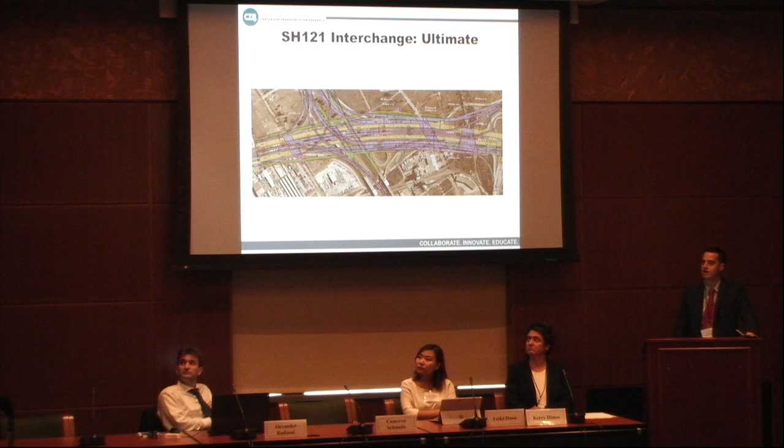But they got some additional money—woohoo, yay, we love money. So they got about $70 million, and they said, okay, what do we want to do with this? Their idea was to provide more access to that managed lane system, that highway in the middle. There were two areas where they did that.

The first one is the I30 Connector. This was actually not in the Ultimate plan, but it was so smart—I don't know why it wasn't part of it, I just don't think it was part of the study. What it did was provide a direct connection from I30, which runs right through the middle of downtown, and 35 does as well. Downtown's kind of in this corner right here.

So they said, okay, how can we—this is one of those areas where, as you can see from the colors, there's not much construction planned. So they said, with this, how can we squeeze this new ramp in? That's where that innovative design comes in, with the private sector.

So I'm just going to show you a video of it because this is a visualization conference, and that's probably best.

So again, what they're going to do is take the existing direct connector, peel off of that, and then hop into that managed lane system in the middle. This is just nice to provide people context—so downtown Fort Worth right there.

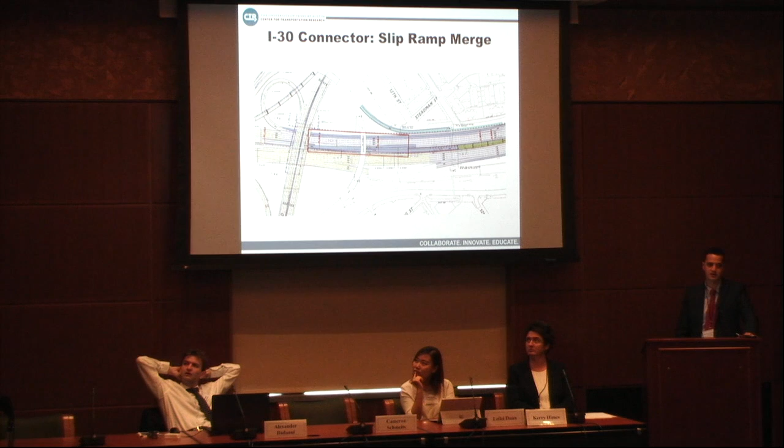We said, okay, well, let's look at it from a driver's perspective. So we took that same model and got a different view of it. Again, what we're doing is simulating a driver—we're driving 60 miles an hour, basically like you're in a car. We've got everything modeled for you.

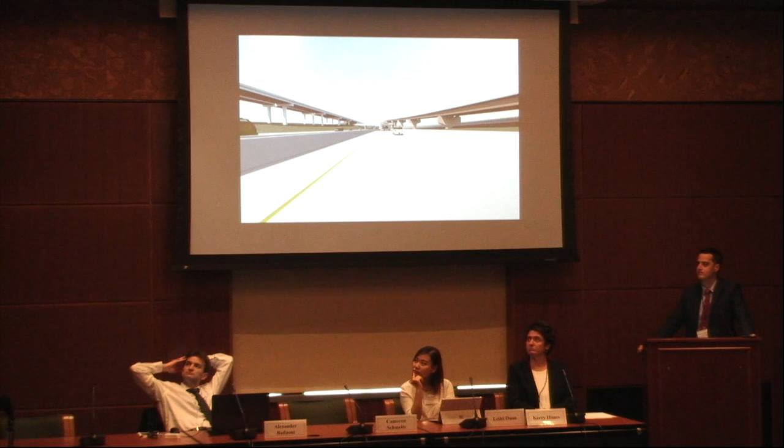So the direct connector's on the right, and it hops over. That bridge is existing to remain. You've got this retaining wall, you've got this barrier. Will I be able to find a gap from all these cars? And while we're traveling at 60 miles an hour during peak, this is a city. You might not be traveling at 60 in the free lanes, you might be traveling at 0. And then these people coming down have been driving for about a mile, going like 120 miles an hour because they've been sitting on that ramp for days, it seems like.

So we showed TxDOT and we showed the developer that. What happened was, we said we'd looked at this several times via the schematic I showed you earlier. But what we didn't see is that the only thing stopping us from moving this merge was a column - that column right there. So we have plenty of room to move that gore and create more space. We looked at that drawing several times, but 3D just gave us a different perspective.

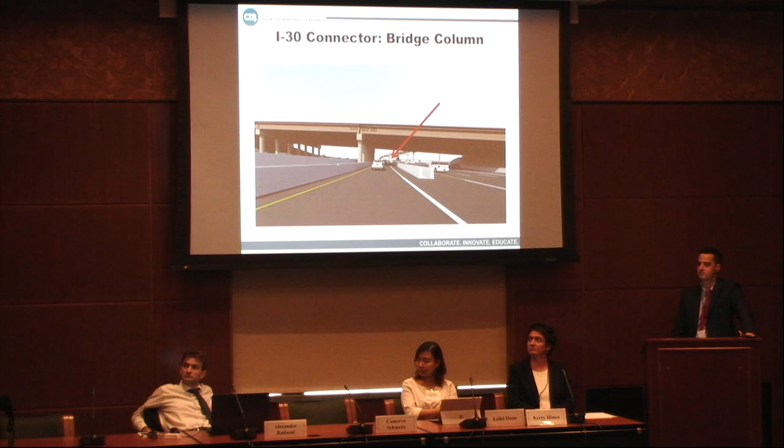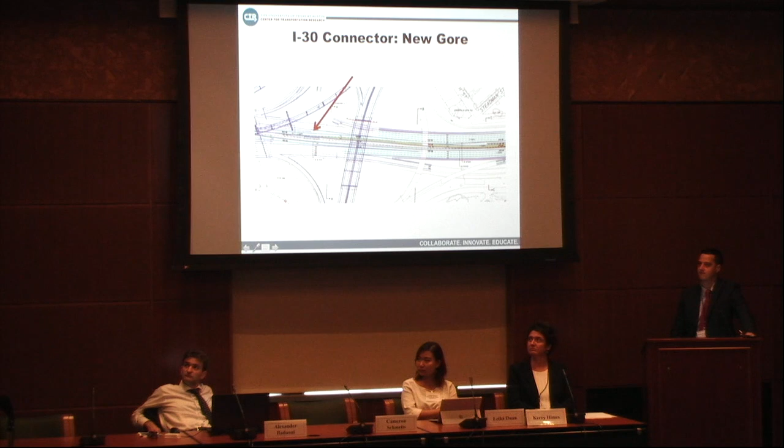So what we did was we moved it. You can see the gore right there - this is the new gore. You see it's significantly further to the north of this bridge than it was before. So just looking at it in 3D, who knew? Different perspective, more information.

Another addition we had, this is in that same 121 interchange, where it's going from nothing to craziness when you get to the ultimate. We had some more money, so we decided to add in this connector. 121 is a highway, but it basically terminates into city streets in downtown. They wanted to provide people access from downtown to the managed lanes so they could get home. In the DFW area we have urban sprawl, which Lele talked about. People drive - I drive 29 miles to work, and that's about average. So having access to those managed lanes is very important for those people.

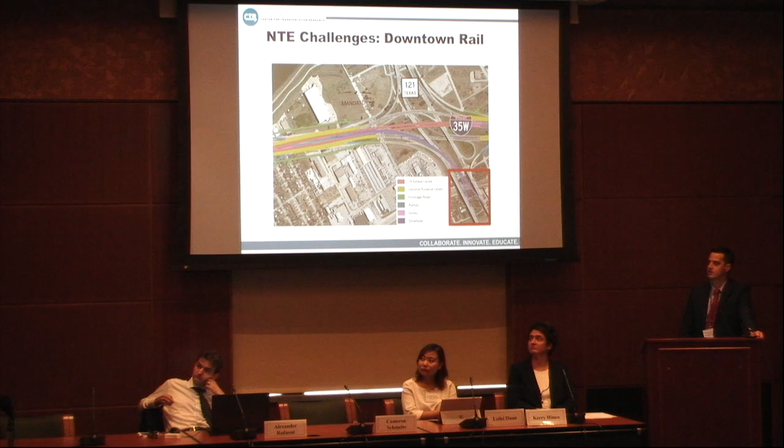Like I talked about earlier, we have architectural requirements becoming more and more a part of our highway. Since we were coming into downtown Fort Worth, the city wanted an architectural element because the existing highway it's tying into has that element too. You can see in the orange, that's highlighting the existing rail on 121. They had this nice, beautiful rail, nice lights, and you can see downtown in the background, how close it is.

So the city of Fort Worth wanted to add that same rail to the connector. We said, oh, we can't really do that - the design speed doesn't work. It can't work for high speeds because there's not enough structural support. But we can do it on this little portion in yellow.

So talking about stories - public and private partnerships are supposed to be partners, but there's competing interests that sometimes come into play. One doesn't want to spend money, one is okay with spending money because it's not their money, but they want to provide a great product for the public. The developer came and said, hey, we agreed to this, but we're not really sure if you're going to be able to see that. We don't want to build something no one's going to see - it's an architectural element. If you're coming on 121, are you really going to see this rail in yellow? If you're coming out, are you really going to see it? We don't think so. There's a rail.

So the project manager looks over at me and says, can you model that? And I said, gotcha.

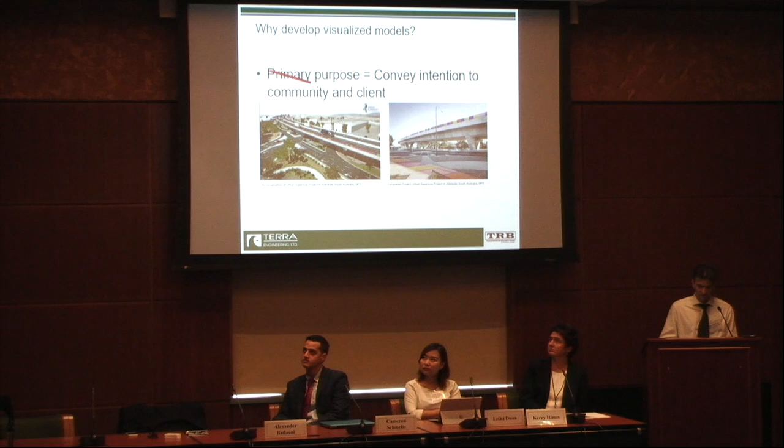However, that is not the primary purpose of why we build models. So why do we build models? The primary purpose is to make a centralized data source for all the information. This way, plan production, quantities, option development, eventually automatic grading machines, and visualization is a subcomponent to that. This way, all the data can come from one source, and you're always guaranteed to get a clean result every single time, not the product of the visualization result.

So the engineering application is really the true primary purpose of why you build these 3D models. These investments in 3D lead to much more increased efficiencies and effectiveness because we're able to make these products in one piece, and then the outputs come from that model rather than the traditional way of building the outputs and then making the model from that.

We have one centralized model, one place to make the changes, as people who know Lord of the Rings, one ring to rule them all, one model to control everything is the idea behind the purpose of building a centralized model. So, how are these models developed? This is what the current teachings will demonstrate.

If you open up any package of a Bentley product or an Autodesk product, out of the box it's to build one corridor per alignment. There are pros and cons to this approach.

The pros being you get one corridor per alignment to get a simpler representation of the road. However, the cons, and the biggest one, is that the road changes so often along its length that the templates you need to build become so complicated that only the person who made them can edit them, because design builds, especially large projects, change every 10 minutes about what they want on the road. So in order to change the product, these templates need to be so comprehensive to cater for every scenario that it's too complicated.

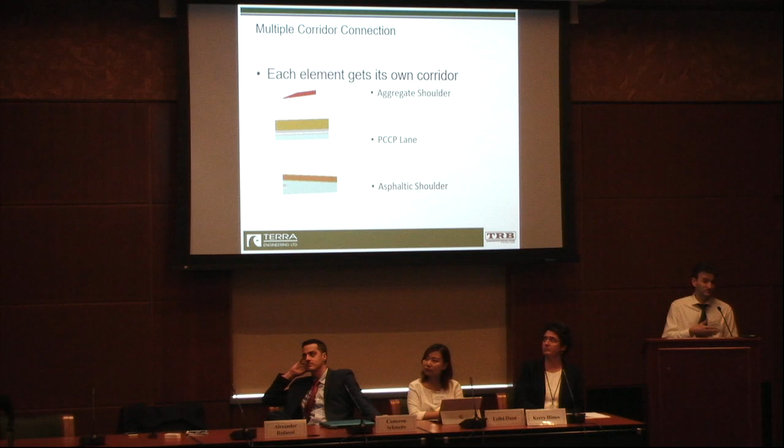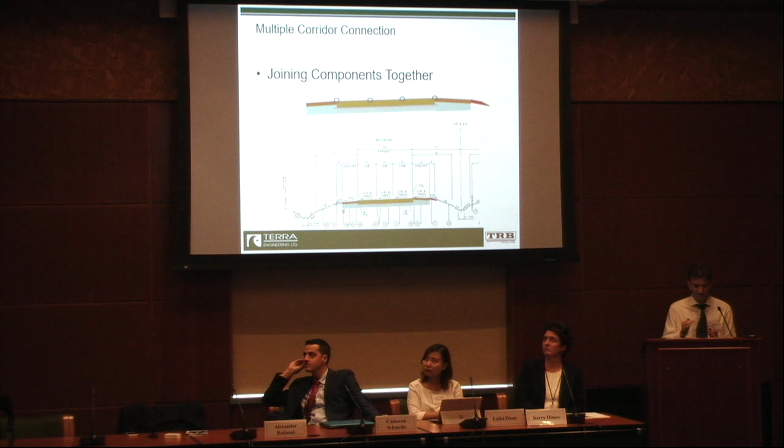Each of these pieces is a different corridor, and each of those circles shows how they all connect. Because each of these pieces connects to each other, we now have a whole series of interchangeable pieces that we can change anytime we want, because sometimes you want to change a part of the road, not the whole thing. You cannot do that if it's one template. You can do it if it's multiple.

I don't like that curb anymore - the client says, I want a barrier. You just switch it out and reconnect. I want to put a lane in there - you insert it where you need it. Notice how the rest of the lanes have stayed consistent. So I've only changed parts of the template.

Now we can go further and start to add external components to multiple roads. I want to add a ditch - I add it where I need it and connect it where it's required. I need a retaining wall and a parkway - I add it where I need it and connect it where I need it.

And I need safety - I need a piece of guardrail, better put that in there. But I only add the pieces where I need them and connect them where I need them. Now, in between, each one of those red lines represents an interchangeable corridor where the template can change anytime you want. So now you have an infinitely complex yet simplified design because it's all made of lots of little simple pieces.

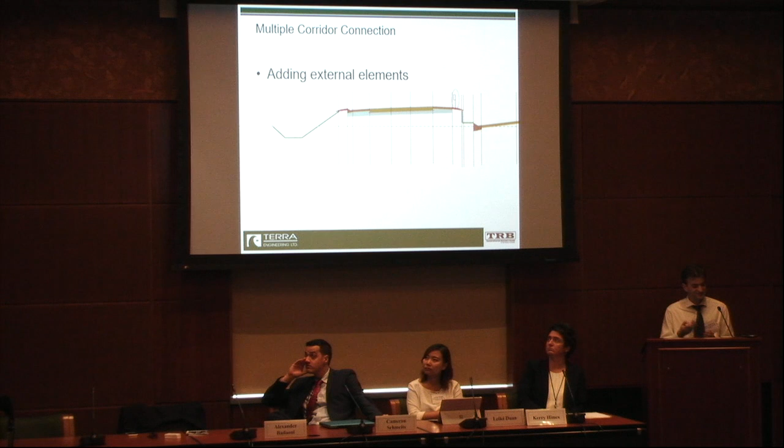How do we manage this mess? That is an understatement. I have a job which I'll be showing at the end, which exceeds 3,000 different corridors. How do you manage that kind of database?

Well, centralized data with a very comprehensive yet concise naming convention.

So how is this better than building a single template? Well, for starters, the templates are simpler. The road designer and the engineer spend all their time doing what they're supposed to be doing, designing the road, not designing the complicated template. So they've got a library of templates and they can use those templates.

A lane doesn't change. The section of tollway with PCCP, subbase, and base course has been around since the 50s, so that section is not going to change anytime soon. You can use that template on any tollway project. A curb profile in the state of Illinois hasn't changed since the concept of curb existed, because Illinois doesn't change very often. So that template, you build it once, you use it thousands and thousands of times on multiple projects. You spend the time creating the road, not the template that feeds into the road.

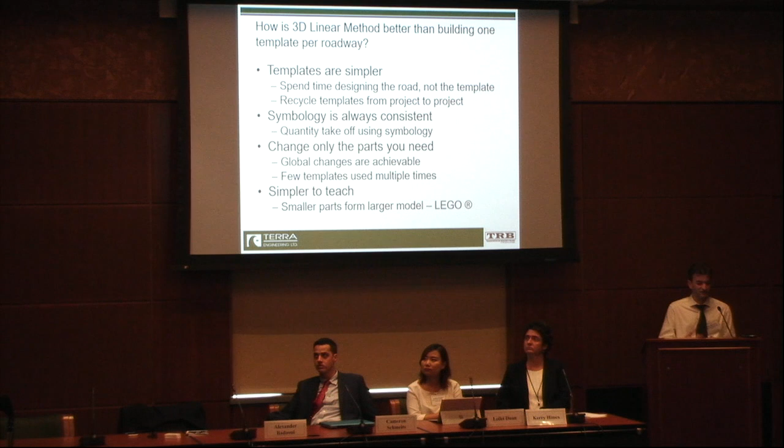And it is actually rather simple to teach, surprisingly—connecting smaller blocks rather than making one big block. People get the principle rather quickly because they actually relate it to Lego. That's why I keep referring to Lego, it's that metaphor of blocks connecting together. More people understand that better than one single template.

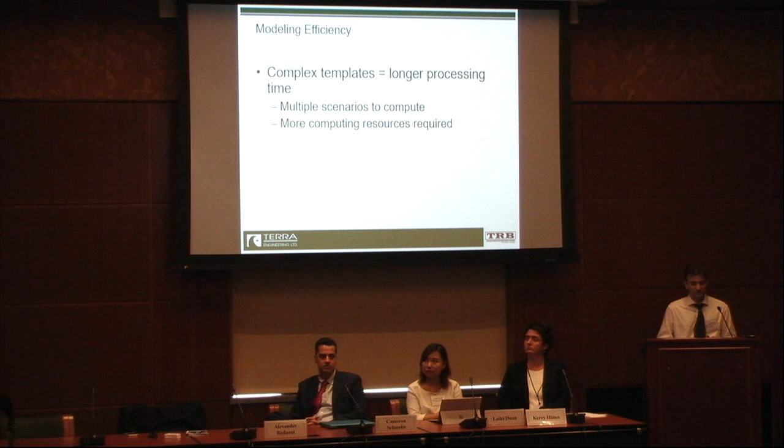So let's talk about the efficiency of generating this work. Complex templates, the single ones, do take longer to process because the computer has to run through every single scenario, and the more components within that corridor, the more time it takes and the more computing resources it requires. Not everybody can afford 2,000 terabytes of RAM and a 400 gigabyte video card, but complex templates require heavy memory to run smooth and effective.

With simpler templates, the fewer scenarios you have to analyze, the less time it spends processing and the fewer computing resources required. Now, I've had a lot of people ask, well, with 3,000 corridors using simple templates, is it quicker than one template? It actually is. The computing processing to run multiple thousands of simple corridors is more effective by a magnitude of 10 compared to one template with lots of complex scenarios. That's how the program seems to work—it does actually make it quicker to make lots of small parts than one big part.

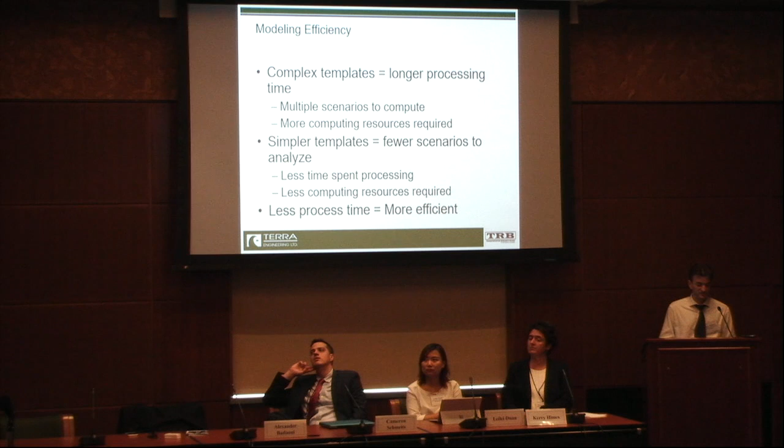And the less processing time, the more efficient and the more money you save. Let's talk about accuracy—it's just as important as efficiency. Because everything's broken down into smaller pieces, you put more detail where you need it. This particular diagram on screen shows, on the far left, the lane.

The middle part is the gore, then there's a ramp, then there's another shoulder, then a curb, then an aggregate shoulder, then an end condition. Notice all those horizontal strokes represent different intervals of template drops.

I don't need the detail on the main line because it's a very simple straight gradient, but I need more detail on the gore. Because each piece is its own independent, unique corridor, I apply detail only where you need it, not across the whole length. If you have a single template and want detail on one part, you need to apply detail on the entire width of the corridor.

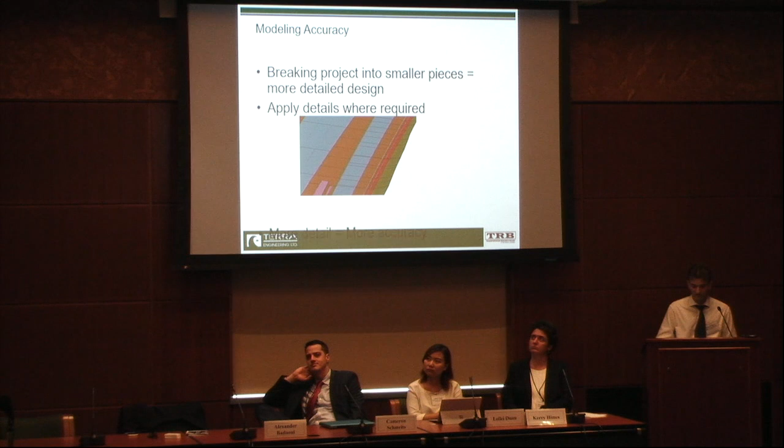That increases your processing time and increases the chance of the computer crashing, which adds time to build the model, costs more money, and then you don't meet deliverables. But by having a smaller piece, you're able to apply detail only where you need it. And the more detail you have, the more accuracy, which is pretty straightforward.

So in summary of what this method represents: lots of pieces, simple design, everything joins together. The more efficient you are, the less processing time you have, and the accuracy is only applied where you need it on the job because it's broken up into smaller pieces.

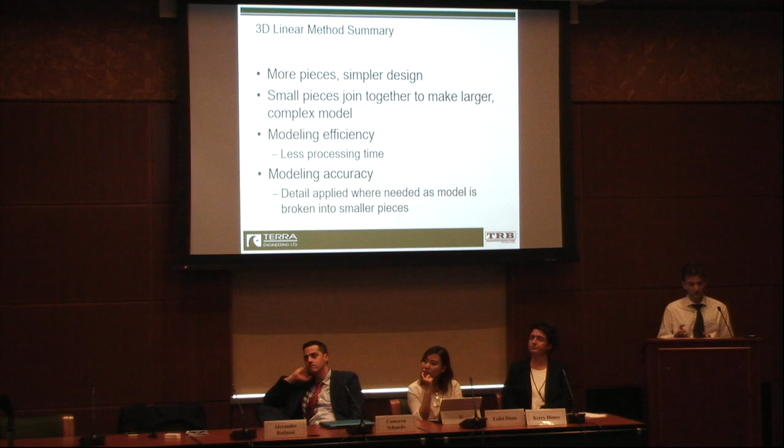While you're thinking of questions, this recent publication about return on investment—the idea of the 3D linear method ties directly into this because it builds the model in a quick processing time. So I will demonstrate a model that has been developed.

The model construction time is a little bit of an understatement, because it was 3 operators over a couple of months, but that was also designing as well as creating the model. If we knew the design from the start, it would be about 40 hours, because it's a multi-level interchange.

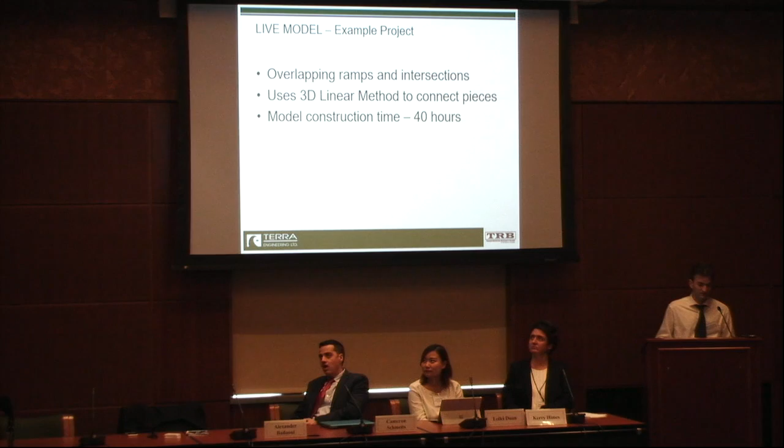So let's go into it and have a look while you're thinking of questions. Are there any questions while I'm bringing up my lovely little model? Where's my mouse? Oops.

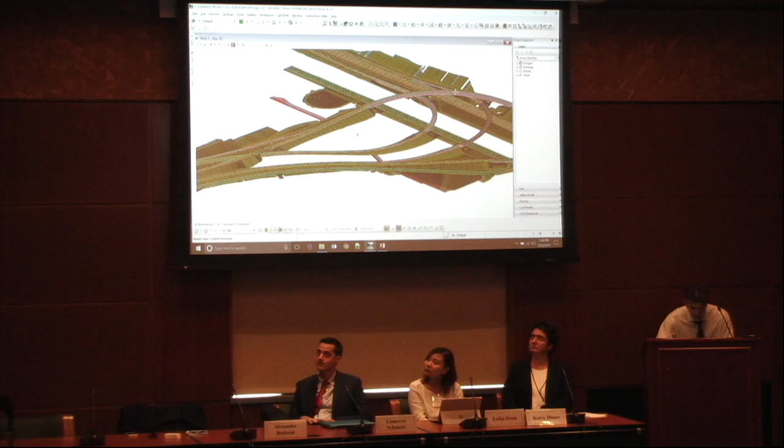So this here is the 3,000 corridor beast. Multi-level interchanges, retaining walls—all the super is done, all the lane pavements are done, the barriers are done, all the end conditions are all correct because it's based on what the engineers wanted.

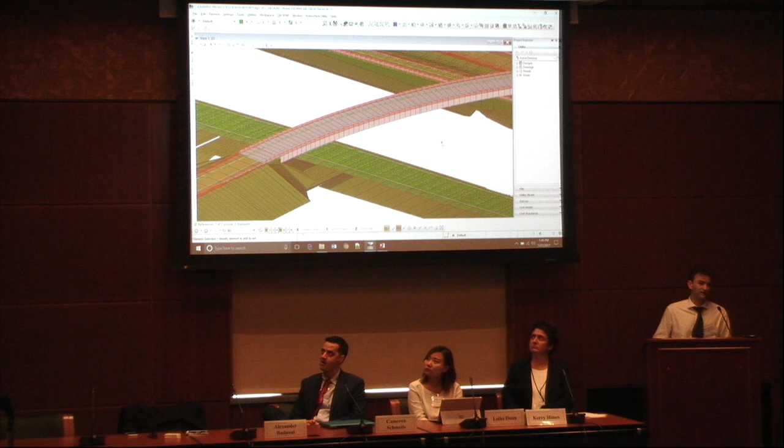The parts that aren't in there are utilities, because another program comes and superimposes that, and the substructure of a bridge, because another program superimposes on top of that. But all the civil elements are there. It's a concept phase, so we didn't bother modeling the rest of the guardrail, but we got most of this job. You can zoom in and have a look.

Each of these pieces is a unique corridor. So lots of little pieces joined together. And because everything's consistent, I can do level symbology.

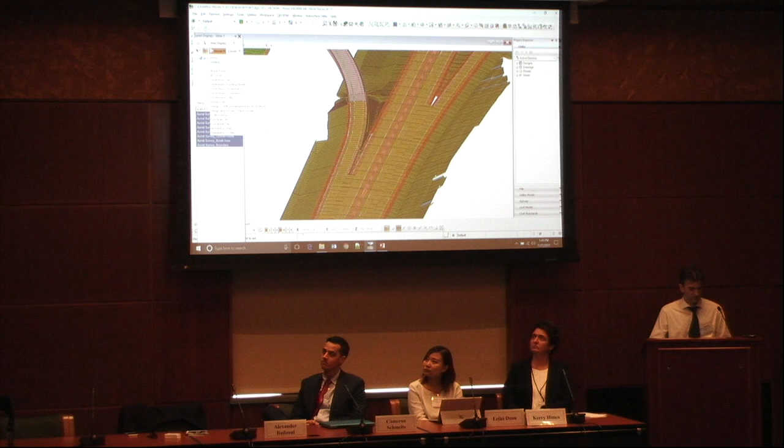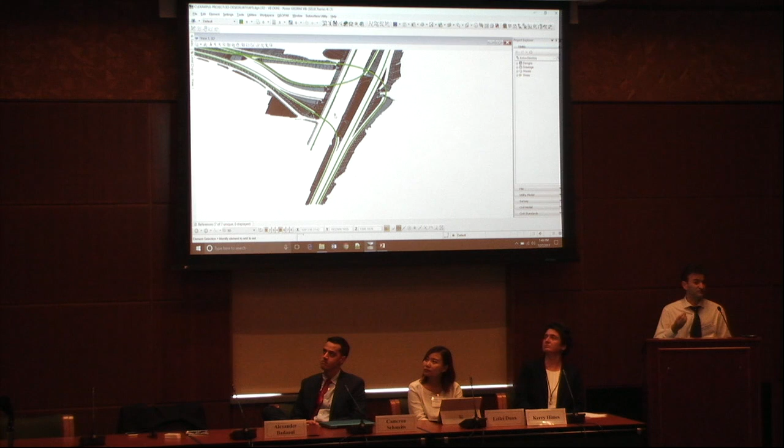Just now, I want to see—that's all my topsoil. One hit, quantity all done, because it all comes from the centralized model. You can't quite do that if you have one piece of template, because you need to ensure that each piece is correct. But while I'm babbling, is there any questions, actually?

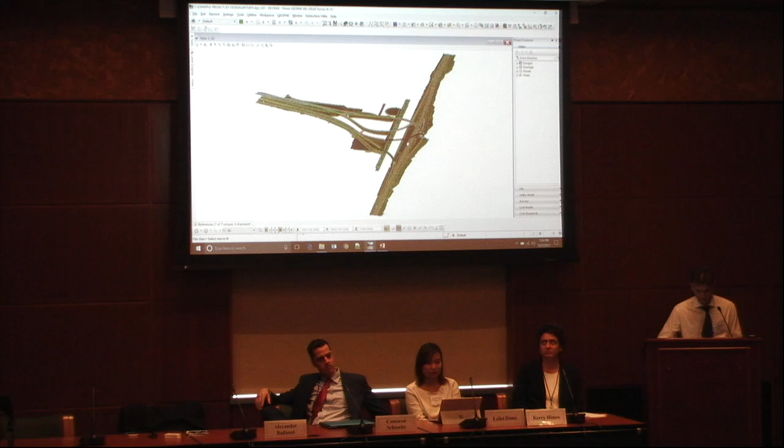Yep, I guess a common question together, mixed. So this is a great idea, right? Building a database and then using the data from the database to then visualize. I mean, that's what GIS has been doing for years, where the fundamental is the database and then the graphics sort of feed from it. And then what you'd call Legos typically, I would probably call these section 3D primitives. I'm assuming every single one of these elements or primitives that you're building is 3D, right?

Yeah, this is actually what they are. This is an actual Bentley package, not an Autodesk package, but it's a very similar operation to Civil 3D. So let me go into these, which are what the pieces are made of.

So they are a sectional plane that just has a curb. It's a cross-sectional element that gets projected along a prism using an alignment. So that's what it is—it's a 2D section that gets projected into the third dimension.

Well, actually, this is a YX plane—oh sorry, a YZ plane, and then the X plane is along the... extruded. Yeah, they're extruded planes. That's how the program seems to work.

How are these assembled together? Are they done visually and manually, or is there some scripting involved—like a rule-based system, where you create an array or have primitive A follow path B, things like that? Well, there are two ways you can connect templates together. In this program, there's a thing called a point control. So each one of these templates... let's go to lane one.

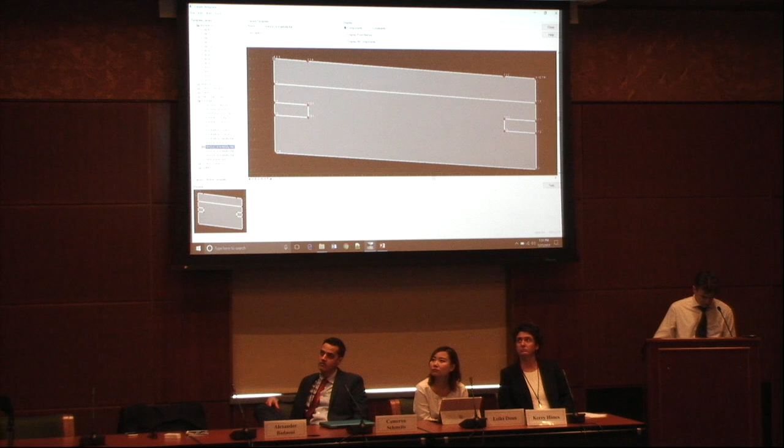So let's see, pavement, where is it? Pavement, main line. See these little red crosses? They represent different points. Every template has a ref point here and a width point there. I connect the ref point to a width point via the interface known as a point control, which is a drop down in the program. And that width point connects to another ref, which connects to another width, connects to another ref. So that's how they daisy chain together.

The other way to control it is each one of these points can be controlled via a parametric constraint, which the program can read. So that width value, by default, it's going to be reported as 12 feet to the right because it's 12 positive. If I want to change it, I insert the template into the program, and then it comes up with an option known as a parametric constraint, which is here. It's probably not going to work for me because I don't have full access to the database, but the parametric constraint, then I click on the corridor and it lists all the ways I can control that parametrically, then I switch the pavement over. Or the slope, I switch the slope over because I changed from what the default setting is. So that's how you can control that mechanism.

Other questions? One thing I'm like, you spend more time on rather than the building side. You spend more time on the connecting points. Pretty much. Yeah, I spend more time connecting the blocks together. That's where the effort comes in. And that's actually a lot quicker than building this ginormous, ugly template that takes a year to finish.

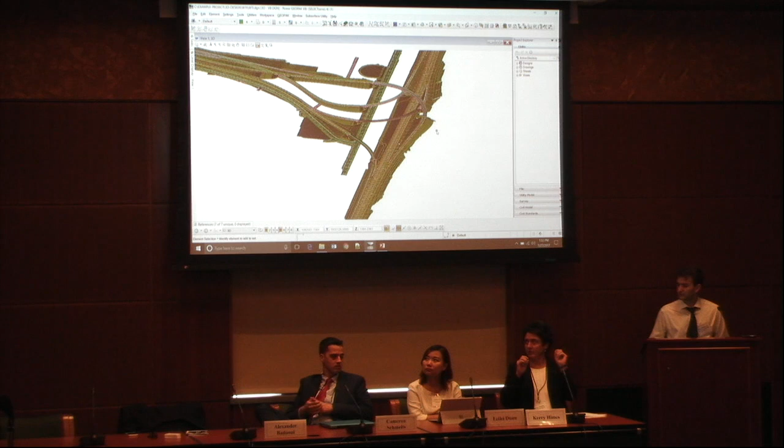As far as applying texture to this, you get, like, take your process and wet it with Cameron's output. Is there any sort of processing or any sort of step that needs to be interjected in that to get from this model to that realistic, photo-looking output? Cameron mentioned that he can take DGNs. This is just a DGN. So you can take that model and supply skins. It'll probably export out as a mesh, and then you can texture a mesh. Yeah, these things are all meshes. So it can export out and then you can make it pretty.

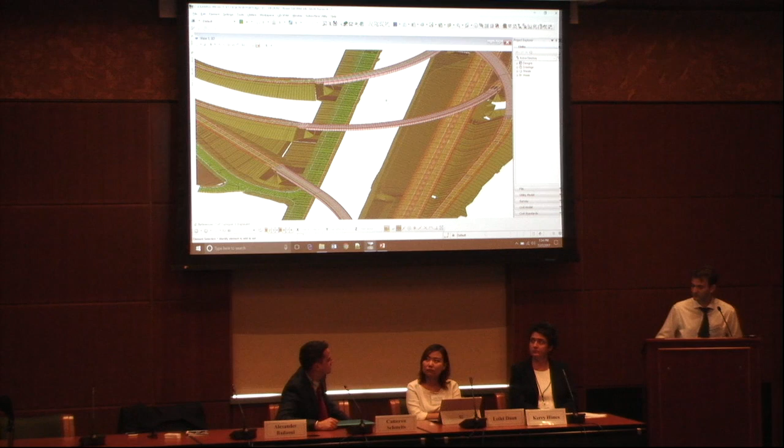Yeah, I mean from an engineering point of view, I prefer the solid colors because I understand that yellow is PCCP pavement, but the average builder would go, what the hell is yellow pavement? My road's not yellow, it's grey, so that's where the texture would come into play. That's the disconnect for the public. They're like, everything's gray. And for some reason in Illinois, all structural elements have been rendered as pink. It's just a historic color. That's just what they do. So that's why all the bridges are pink. There's no engineering reason why it's like that. It's just a historic reason.

And aggregate shoulder is red. But I don't know why it's red. It's just red, there's strange reasons. And topsoil is blue for some reason. But yeah, it's very historic reasons for colors. But this is an engineering output. That is pre-information that will go into what Cameron's model does. This is like the behind the scenes.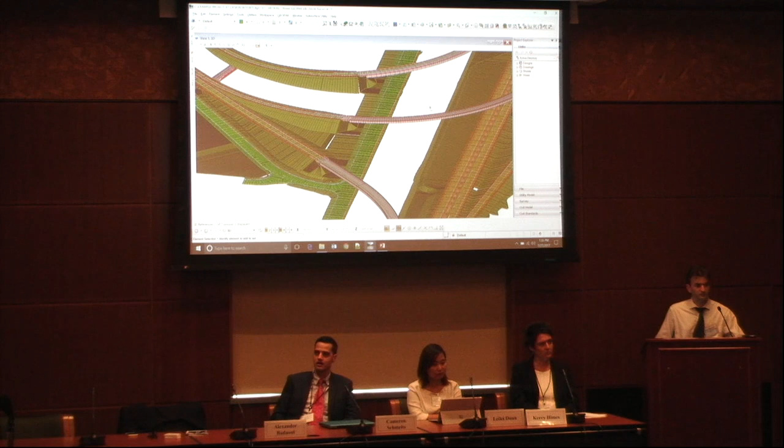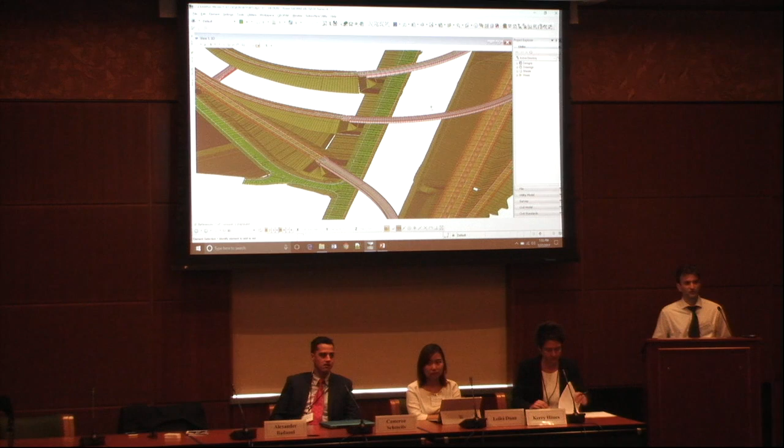Any other questions? I was just gonna ask, have you done any quantification of the time savings and all those criteria you established to compare the traditional template-based model with this paradigm, or 3D linear as you call it? Not a formalized study, but proof of concept by the fact that we managed to save a few million dollars in budget, because the budget originally was catered for 50,000 hours of creating cross sections. I was able to create it within a day because it's from the program. So those hours became modeling hours. So there's realistic time savings based on if the initial job is budgeted to do methods in the traditional way, and then you do it via this way, then you'll see the result in the fact that you've saved budget and hours. But no, I wouldn't say a formal university study has proven that, with two parallel projects, one doing things the old-fashioned way and one doing things the new way.

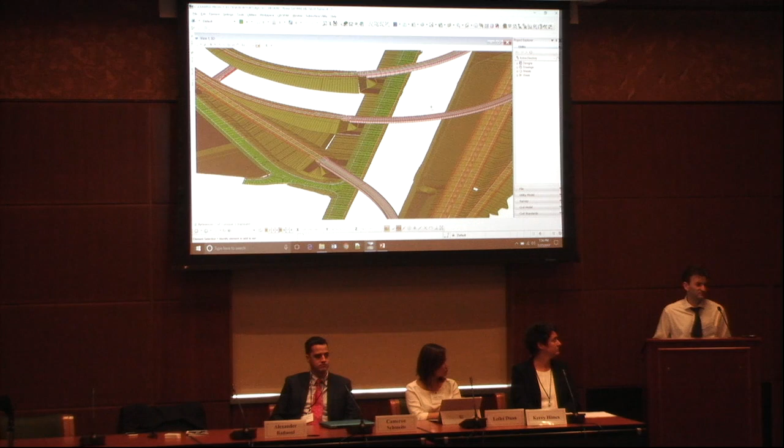It's usually intuitive by the time the outputs come out that yes, you have saved time, and time is the money factor. Thank you guys.